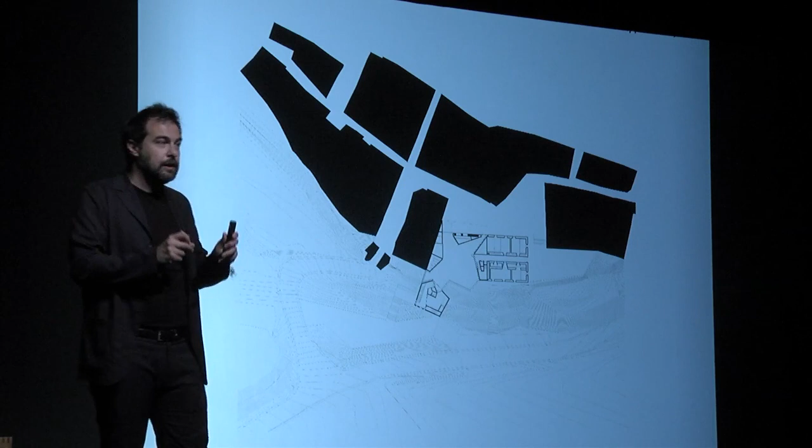From one side, here, with this small element, it's something very sensitive to the context, and from the other side, with this archetypical element, which we will see is a tower, it tries to establish another type of relationship with the landscape. So when we see the project from a distance, it is just an archetypical tower that, as I say, marks the finish and establishes a clear limit between the urban and the natural landscape. It is an autonomous element.

You have to imagine that this landscape, as I say, is an old landscape. It's a very flat natural landscape where small towns appear with medieval towers and so on. But if we go closer to the building, we start to discover that, in a way, the tower is not alone. It's not just an independent object placed there, but it rises from the pre-existing element that hosted these offices for this company before. And there is here a very small link with the pre-existing.

And if we continue, we start to see how the building wants to be specific for this place, but at the same time, it is something more autonomous. And this image, for me, is quite relevant, quite important, because it's a visual translation of this contradiction, of this dichotomy that I mentioned before. From one side, the building is something autonomous, independent.

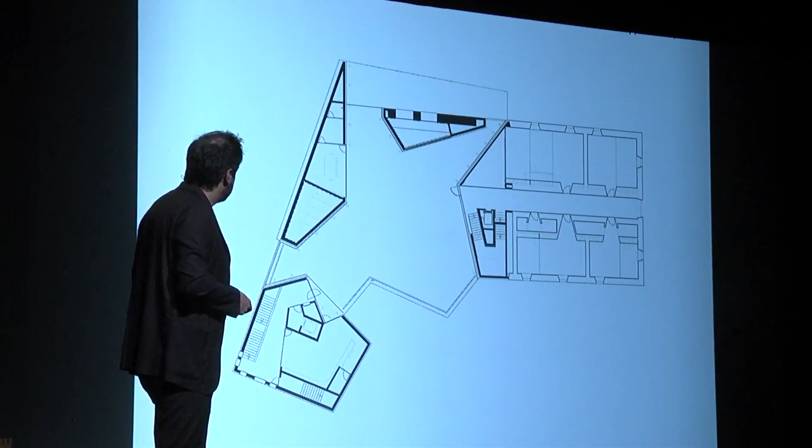It conforms to its own internal rule, but it rises from the pre-existing one in a way. So it starts to be specific for this site. In a way, it starts with this joint. It creates here a plaza, a platform, and then it becomes more and more independent. And the tower contains the most important program, the more representative program, and in the basement there are the other offices, etc.

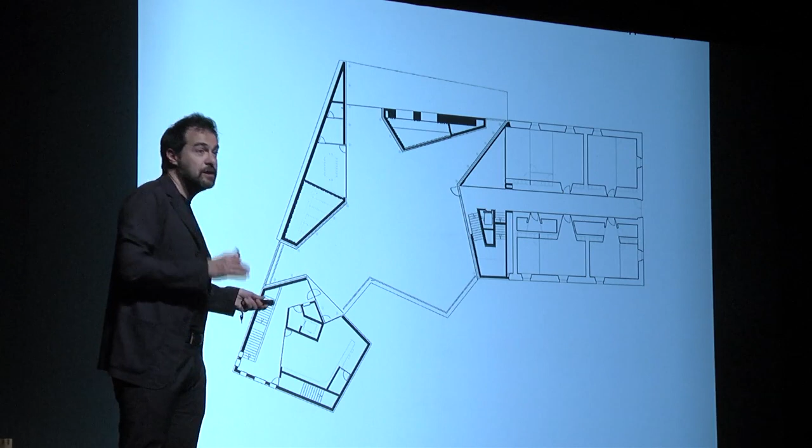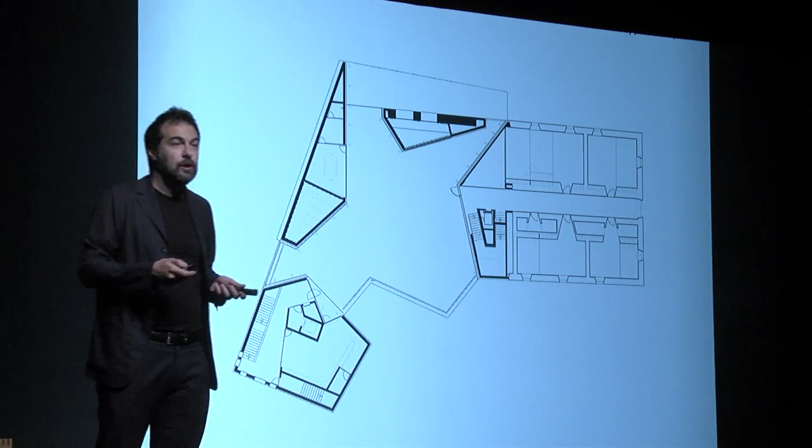But what is also very, very important in this project, and also in the other projects that we will see, is that all our projects started with a reflection about the public space. Here, for example, in this drawing that represents the main level of the building, in the middle of the project there isn't a building, but there is a plaza. In the middle of a private building, there is a public plaza. So in a way, the architecture is just the frame of the urban. And so this image that represents this plaza is for us like a manifesto.

What is important here is not the architecture in itself, but what happens in between the architecture. This central void, this public void in the middle of architecture, gives meaning to the building. It's a private building, but it's able to return something to the city. So in this project, but also in other of our projects, the architecture is just the frame of the public space.

And we try to work in a very essential way. Here, for example, there is just one material, the stone that covers the entire building, the floor, the walls, the roof, and we try to create something more monolithic, something also primitive or basic or archaic in a way. And so in this plaza we also try to establish a kind of balance between a more intimate space here and the openness of the landscape.

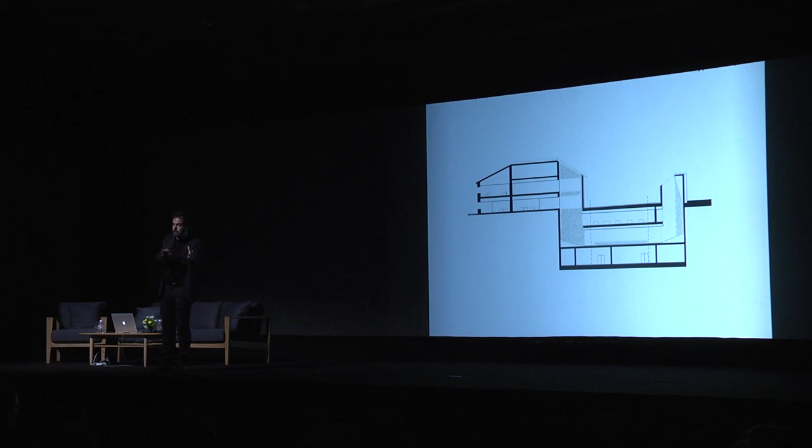But from a programmatic point of view, the project is also very radical in a way. In order to open this plaza in the middle of the project, we put a lot of the program underground, to have space above to create this public plaza. So every project has a small secret in a way. We try to focus our attention on how to create public space and discover how to organize the program in order to have the possibility to create that public space. This is an image of the lower auditorium with this big skylight.

We spend a lot of time discovering which type of materiality the project should have in order to establish this intimate relationship with the context. Here, for example, the building is in stone, the same local stone of the previous building, in order to give continuity and transmit the same gravity, the same solidity of the original building. You have to imagine that with the passing of the years, the building will transform, and step by step it will be more and more linked with the original one.

And here it is important to notice that the building is not built with a ventilated facade, but we forced our client to build it with a real stone facade in order to transmit the same gravity or mass as the original one. And speaking about materiality also means speaking about time, discovering how the building could transform over the years. So it's a way to control or reflect on what time means in architecture.

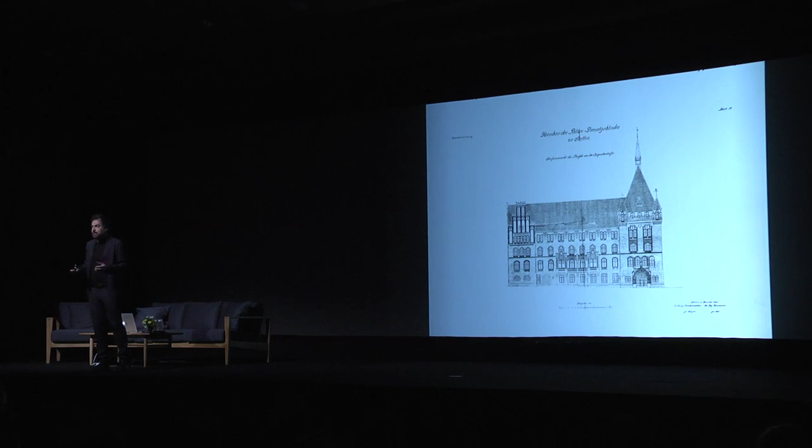So this old drawing represent our closest neighborhood. Is the building on the site of the new Philharmonic. And when I speak about specificity, I want to say that specificity means also discover how to learn from what exists. And this drawing represent or discover to us which are probably the main identitarian element of this type of architecture. These drawings speak about mass, speak about verticality, speak about repetition in a way.

So starting from there, we try to reinterpret it through an autonomous thinking, because speaking about or reflect about specificity, it doesn't mean nothing if you don't filter it through your own interpretation. And the result of this interpretation is this model, is our proposal. It's a building that's still speaking about verticality, repetition, mass, order, composition in a way. Speaking about all these elements that, from our point of view, were identitarian for this context.

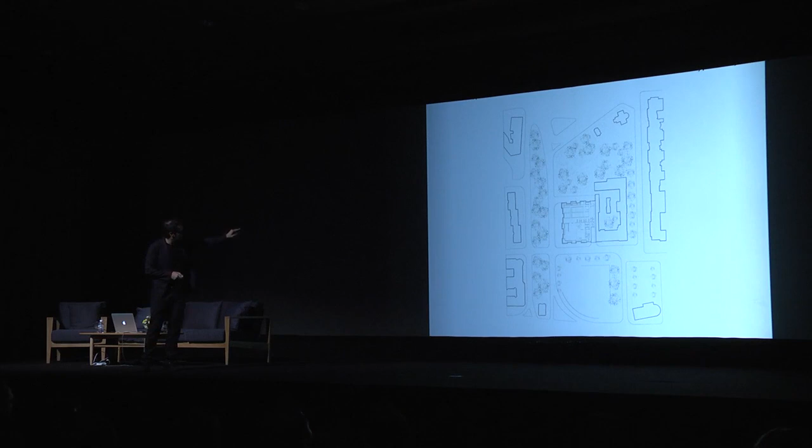And the Philharmony is the first step of a bigger urban renovation of a quarter that now is quite depressed in a way. And from an urban point of view, the building just tried to fix a corner, create an urban corner inside of a quarter quite fragmented in a way. In this case, the project fulfills the entire site.

And the result of our reflection is this image. I can say that all the elements that were in this building, that was our neighborhood, are transformed and converted in something new into the new project. The project is like a stark monumental element in a way, very simple, where the only expressive element is conformed by the roof. This very steep roof that conforms the landscape of the city in a way informs also the project.

But you know, when you design a project, there are many things that happen in your mind, and also we try to establish maybe a kind of relationship with this expressionist condition that is still present in this area. So without any type of nostalgia, we modify the material of the building, to give independency to the new project in front of the existing building. But the only sign of the project is the roof, because we try to be very synthetic, very basic in a way, but also because there are a lot of trees around, so from the distance you will see the building floating over the trees.

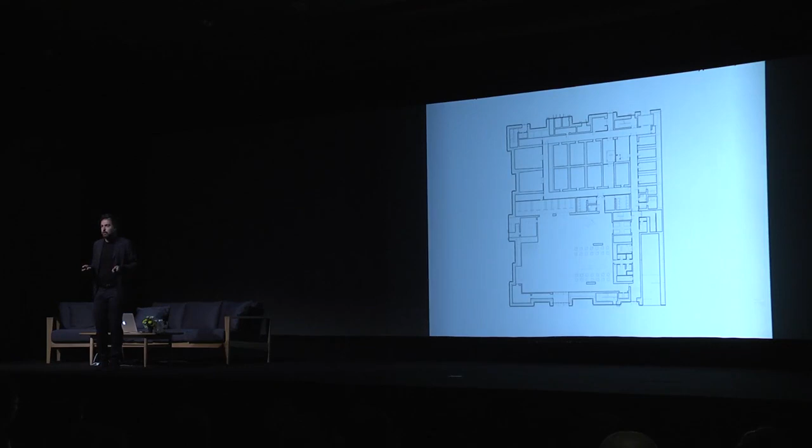And here in this case, the reflection about the public space is still the key element of the project. In this case, there is a very big foyer here that occupies half of the ground floor. Basically, it is conceived like an inner public plaza. So, in this case, the relationship with the public space is not outside of the building, but it became inside. This space is conformed by the natural light coming from the skylight, by the shape of the two concert halls, and from the vertical connection element of the stairs.

So, in a way, this foyer is a public plaza, because what is important is not the architecture in itself, but what can happen inside of a building. Our work as architects is to give the possibility to the citizen to use the building and transform it and have activity inside. So at the end, the architecture is just a background where things happen. And this gives meaning to our work and to the architecture. So in this project, like the other project, we try to solve a very, very complex problem with simplicity.

There are the two concert halls, there are two boxes, inside of this crown. This crown contains all the technical elements, vertical elements, etc. And the interstitial space that appears in between these elements is the public space. So we tried to make the project very, very simple, very clear, very understandable in a way.

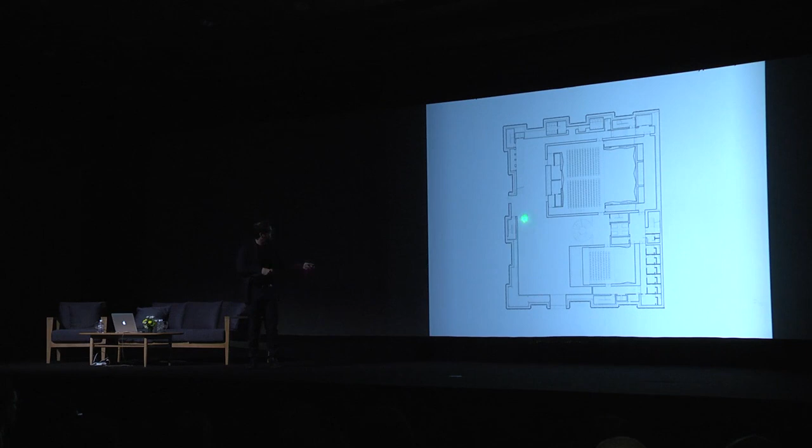And then there are several levels, and in the upper level there is an exhibition area here that connects the two main systems, because inside of the building there is an internal loop where the people can go up here or with these stairs here, move around the building, and they rejoin here in this area. So it is important that a building of this dimension should be very easily understandable in a way.

This exhibition area is suspended over the foyer here, and you have a visual connection to all the spaces, and this permits the visitors to be oriented inside of the building. But the main program of a symphonic hall is for sure the concert hall. And the challenge was how to design a contemporary concert hall for classical music.

So we started to work basically with three elements: with the section, light, and with the ornament. The section, as you see here, is basically a reinterpretation of a traditional and classical typology of the Eastern European concert hall. There is a very flat floor here. So this is the first step in order to transform a tradition into something new.

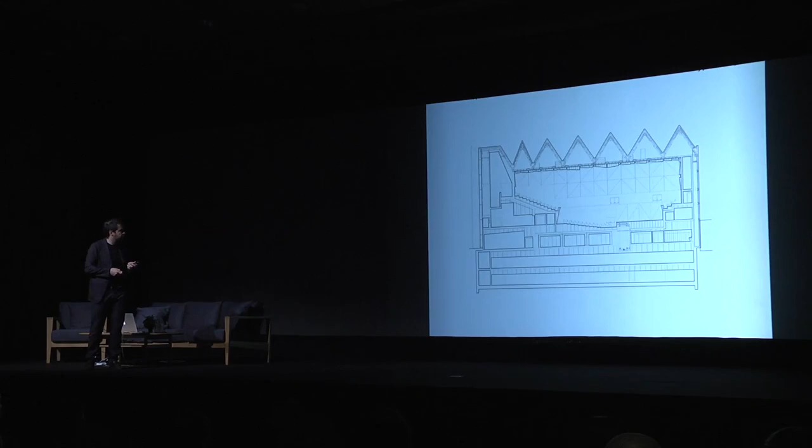But then we discovered, also starting to have in mind this idea of ornamentation that conforms the classical concert hall, and we started thinking that probably starting with a detail like this, with an ornamental detail, we were probably able to conform the entire concert hall. So basically this concert hall is conformed by a decoration or ornamentation on a large scale.

But what is really interesting is this ornamentation is not really just an ornament, because all these surfaces are made like this in order to achieve the best acoustics. They are really a very high-tech element in a way. So if we are able to join decoration with technique, the ornament is not an ornament. It's something else. And so in this case, we tried to discover how an idea of an ornament is able to create something performative for a building.

And here, as I say, the other element very important for us was the light. The light was another element able to give continuity to a tradition. And the light also transformed the perception of the concert hall inside, the materiality of the concert hall. But we also worked with a very unusual material here. The concert hall is conformed with a gold leaf, a synthetic gold leaf, in order to, again, give continuity to something and discover an unusual or unexpected use of this materiality in order to conform a new, contemporary concert hall.

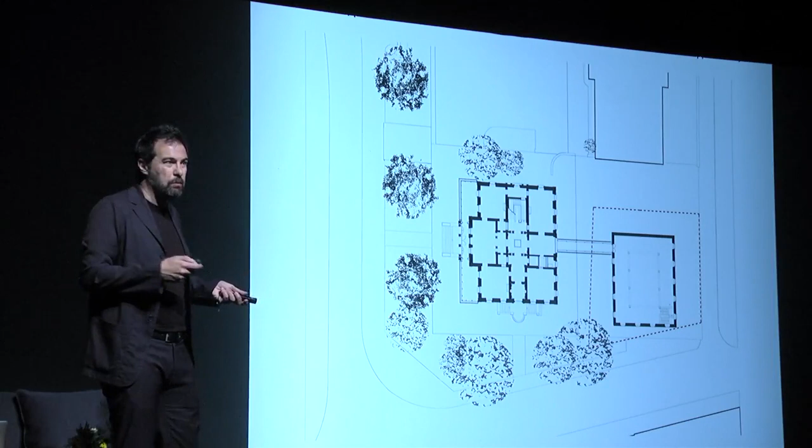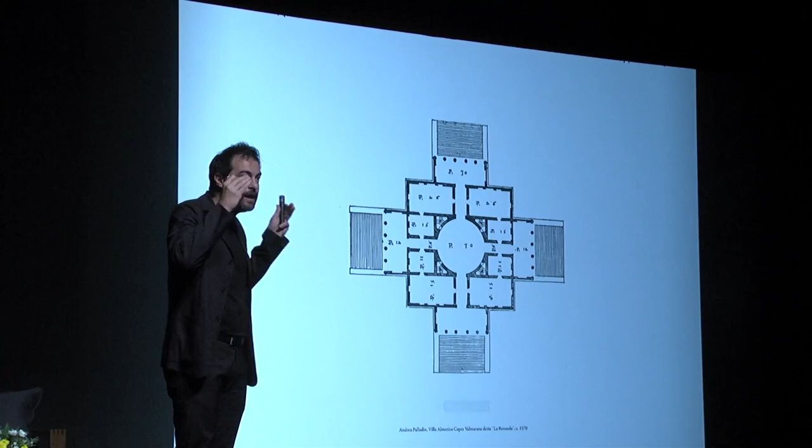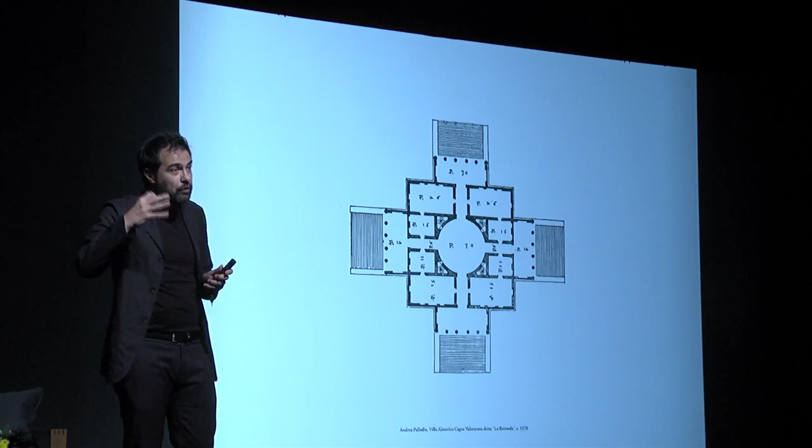So the competition that we won was very, very complex because they were asking us to place a very big program inside of this site, in that part. And here you can see this conformation of the historical building based on La Rotonda. So the condition of the original building for us was very important. This is the Rotonda by Palladio; this idea of an absolute building was important for us in order to discover how to create the new building.

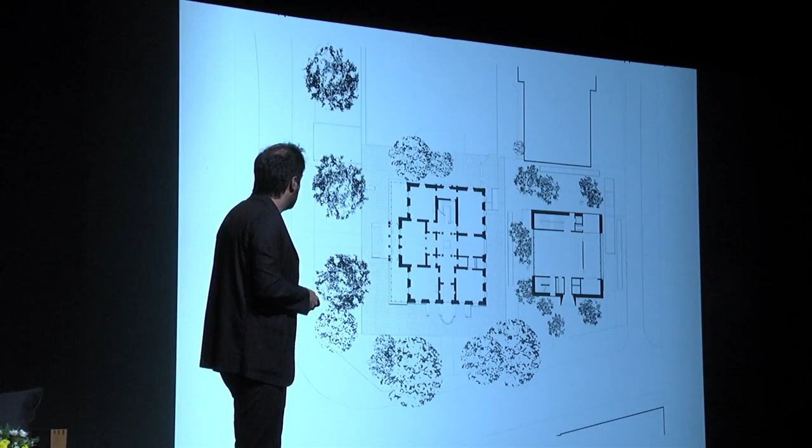So what we did was very, very simple. We just extracted the axes from there, imported them to the other building, and we tried to make a project very simple, super simple, very small, in order also to use the garden around the building and make the garden also around here, in order to use the garden as a link between the two buildings. So, in a way, what we tried to do is create a diptych.

The same identitary elements that appear in this original building are transformed into the new addition. Each one is an autonomous building, but each one is conformed with the same conceptual elements. And again, the building is something super specific for this condition, but it preserves its autonomy, as I said at the beginning of the lecture. And which are these elements?

I can say that our project, in a way, is a neo-Palladian building, because as we see, the plan is conformed by a repetition, a very regular sequence of rooms. It's conformed by a double symmetry that comes from the original building. And there is this kind of bas-relief that conforms the facade, creates an ornamentation, and tries to create a subtle link with the decoration that conforms the original building.

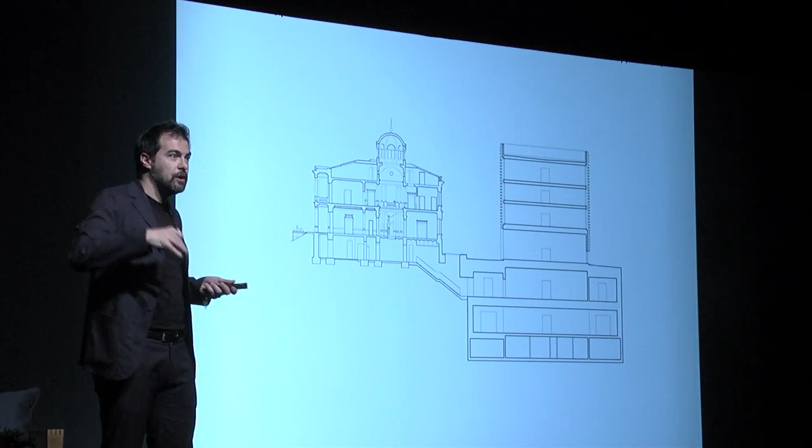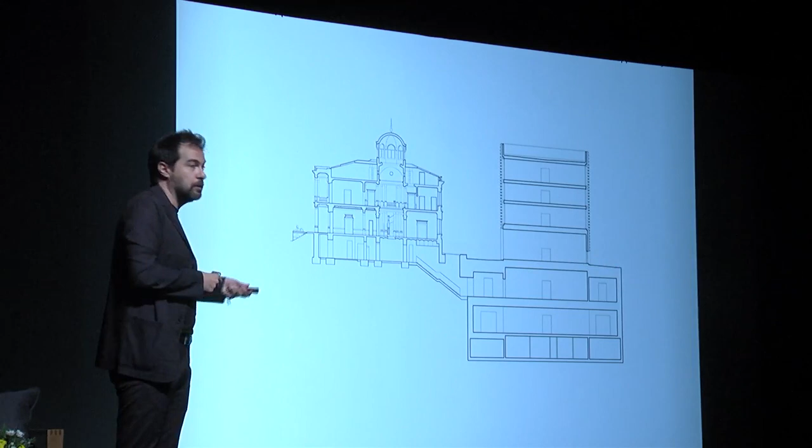We placed all the exhibition area underground here, and we let only the public function use outside here. So in this way, we were able to reduce the size of the building, reduce the footprint, and give importance to the public area. And the connection with the historical building, with the exhibition area made by Peter Zumthor, became here with these stairs in this part.

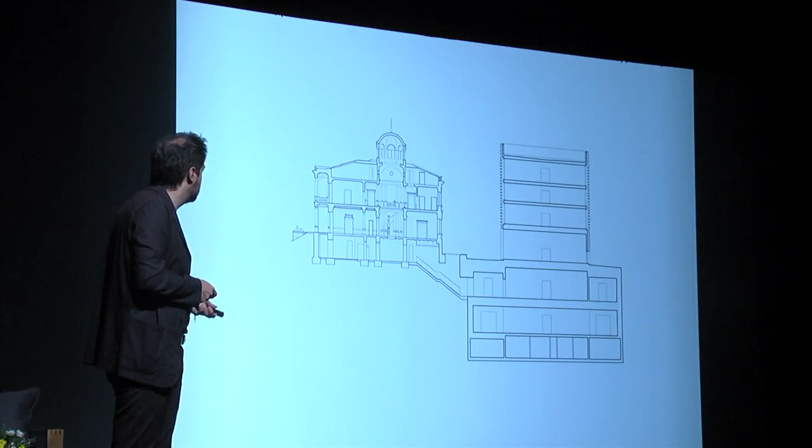So the foyer, it's again a public area, and the relationship with the historical building is quite evident. The facade of the historical building is the facade of the new building. And also what is important to know is that this area is the foyer, but at the same time it is the delivery area, because here in this area a truck can enter, and here there is a big elevator. So we try to combine also the program in order to compact the building to the maximum.

So this simple drawing that I personally love is, I think, one of the most synthetic, most basic, most elementary drawings that we did, because there is everything here. The building is composed just by the structure. The structure contains the core, contains the elevation. The composition of the building and the structure is the same thing. So it expresses our effort to be synthetic in a way.

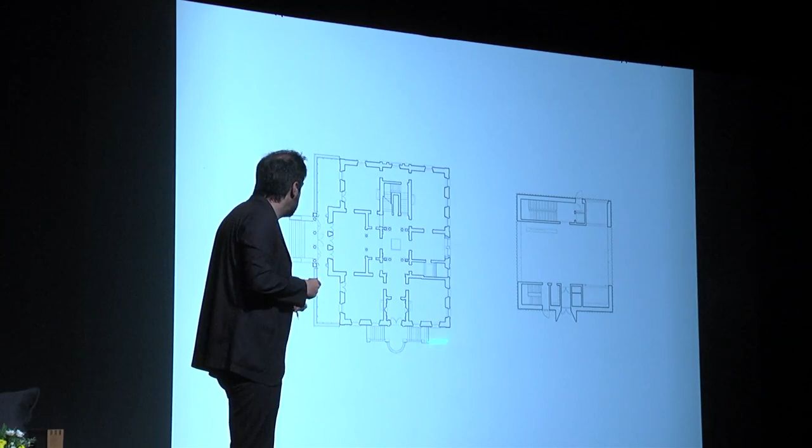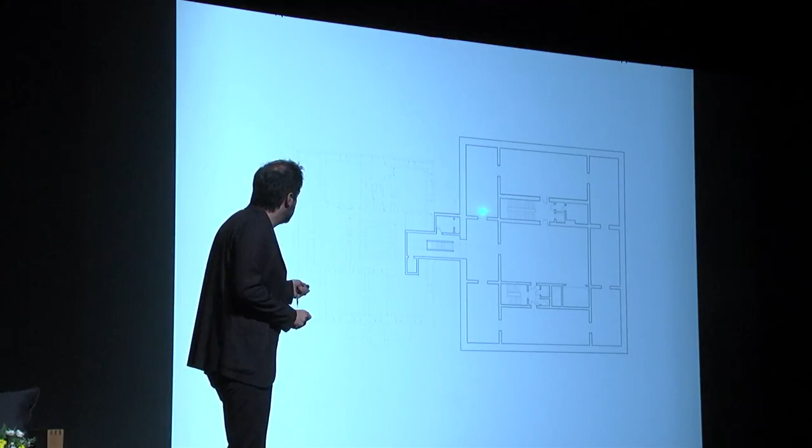And this plan and this plan, they are balancing in a way. There are these stairs, this element, there is the portal hall. Everything is simple but quite clear. Here, these are the stairs that go down. This is the first floor underground. The museum is in concrete. And here is the plan of the first floor, and you see that basically it's composed by a sequence of rooms, in a Palladian way, and there is a loop to visit the exhibition here.

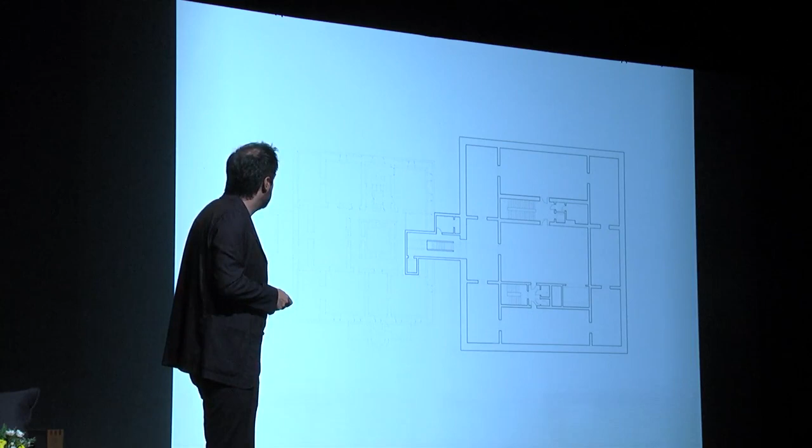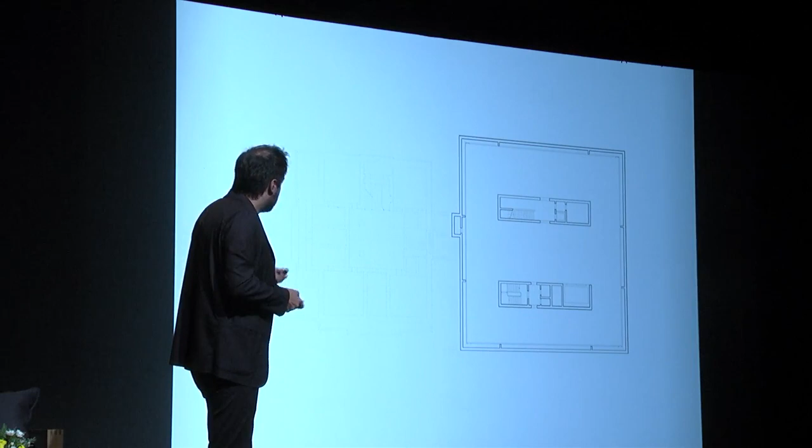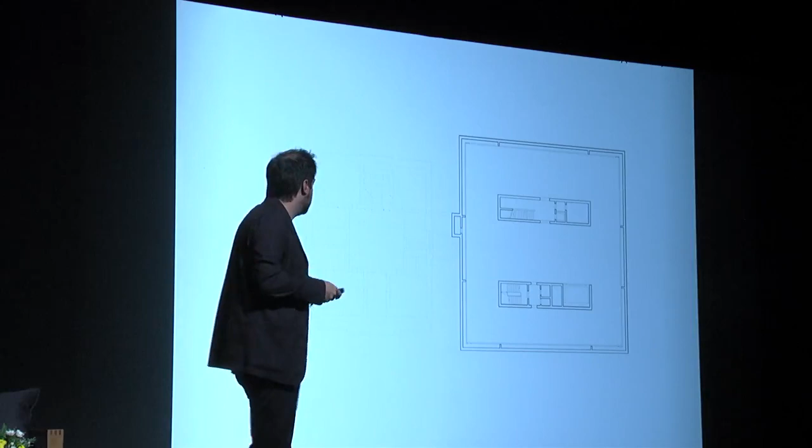These are some images of this museum that is basically devoted to contemporary art. This is the connection to the other building. But in the second floor, again, you see how a complex program is solved in a very simple way. There are just the two cores. This space is for temporary exhibition, very open, and there is no more. But the precise position of the core of the structure permits us to conform the entire program with simplicity.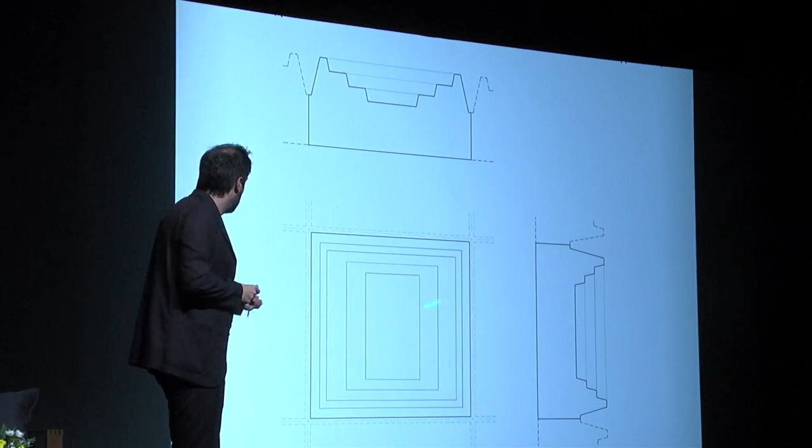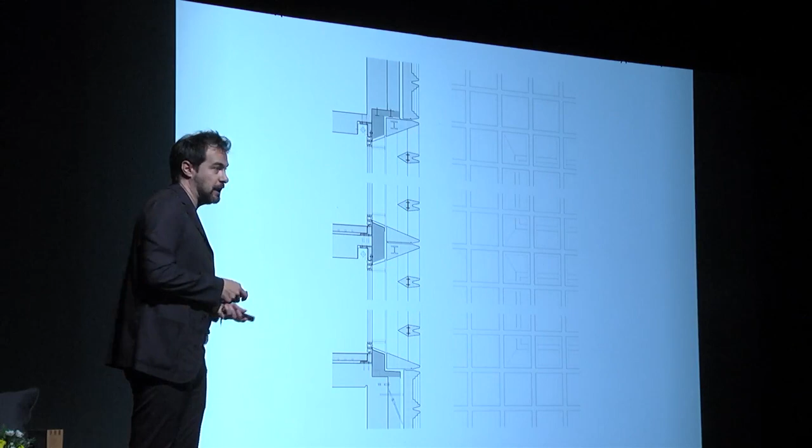So the materiality of the building, as I say, is absolutely important. The facade is composed by a sequence of these elements in concrete. There are prefab concrete elements that conform the entire facade. But you have to notice that when I say that for us it's important to discover how to work with specificity, it is not only to reflect about the form, but it's also important to discover how you can work in a different context.

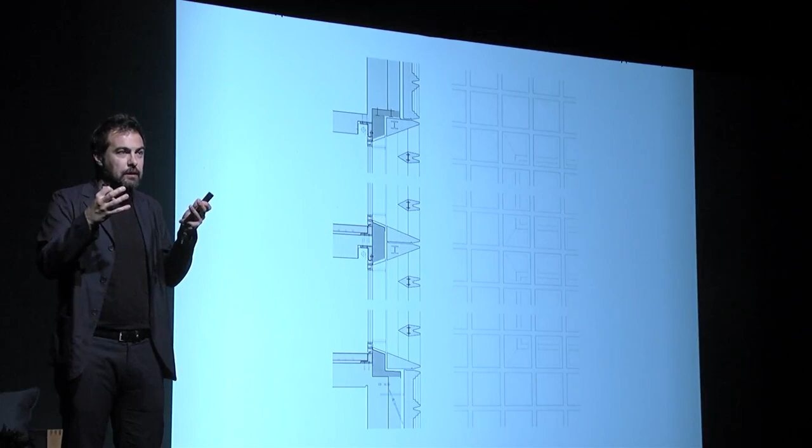For example, the Philharmonic in Szczecin is basically a handcrafted element, because in Poland there is still a tradition able to conform this handmade element. So the concert hall is basically a handmade element. But here in Switzerland, there is a high technology with prefab concrete that permits us to achieve this type of facade, where with the concrete we are able to make edges of only 1 centimeter. So it is important also to interpret how you can work in different conditions.

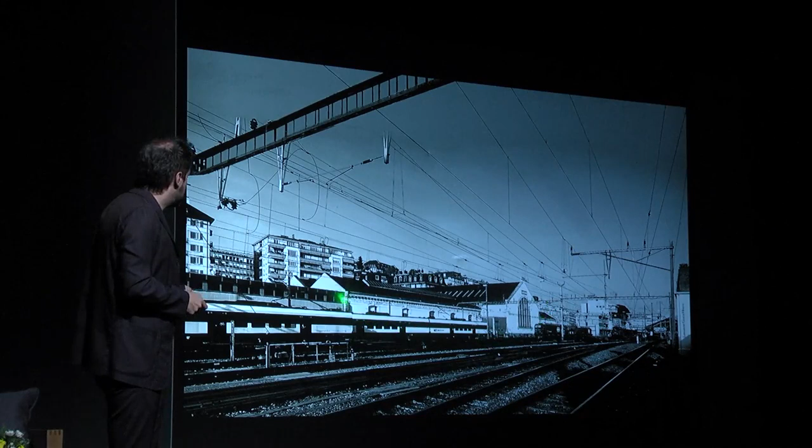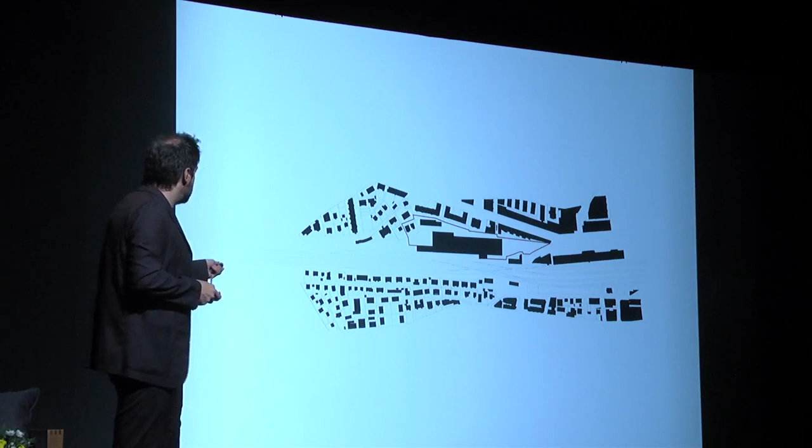In this case, this drawing represents the original area, no? The site, very big, and then with the presence of this building. We spent a lot of time during the competition discovering how to transform the historical building into a new museum. But at the end, after a few months, we discovered that probably in this case this strategy was not so good. We started to discover that, again, before thinking in architecture, it was important to discover an urban strategy able to create public space. So we started thinking that what was important in this project was to combine urban and architecture.

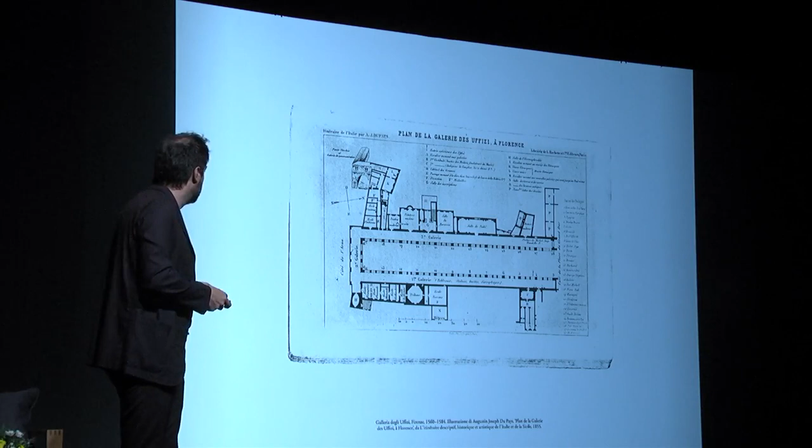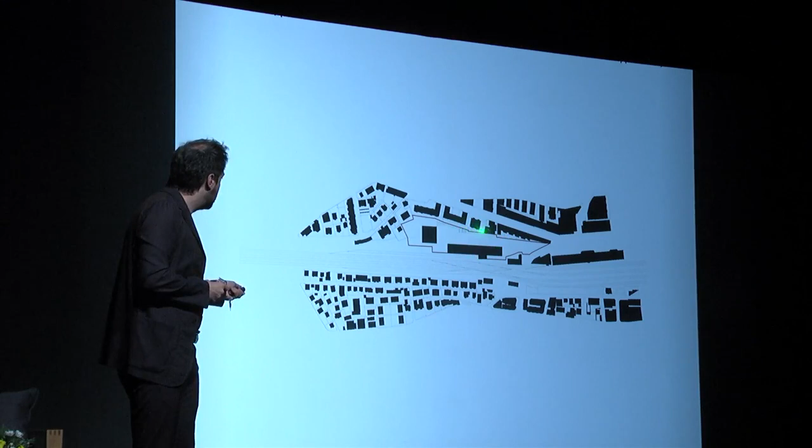Like, for example, in the Uffizi. This is a plan of the Uffizi Museum in Florence, where the architecture and the urban and the plaza in the middle are the same. There is no difference between architecture and urban. So we took a very sober, but at the same time radical, decision. We decided to demolish a big part of the original building in order to create this new big plaza, no? Able to connect this area with the plaza in front of the rail station, and in this way try to conform this new site linked with the city.

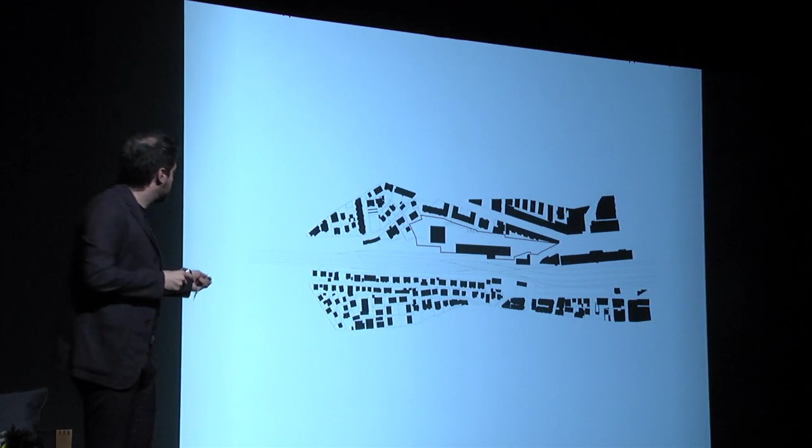Because this project was about creating a new fine art museum, a new museum for photography, and a new design museum. So now the three museums are condensed here in one only building. But what's important in this project was again this public area. So our intention was to try first to create a public space and then discover which kind of architecture is important for this site. So what is important here is, again, this public space, no? And the architecture, the three museums, again, are the frame of the urban space. The Fine Art Museum, Design Museum, and the Photography Museum.

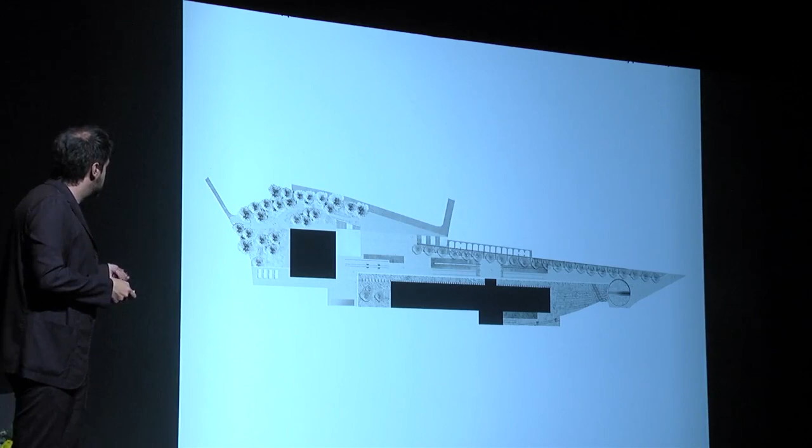And then the building is again specific for this condition. This area is an industrial area in the center of the city, linked with the train station. So the new museum is basically like a kind of industrial building. It's a building very abstract, very rigorous, very simple in a way. So after we discovered this urban strategy, the architecture arrived very, very easily in a way. No? The building is something massive, something solid. It tries to reinterpret this industrial condition that still exists in this area. So this is the general drawing of the master plan.

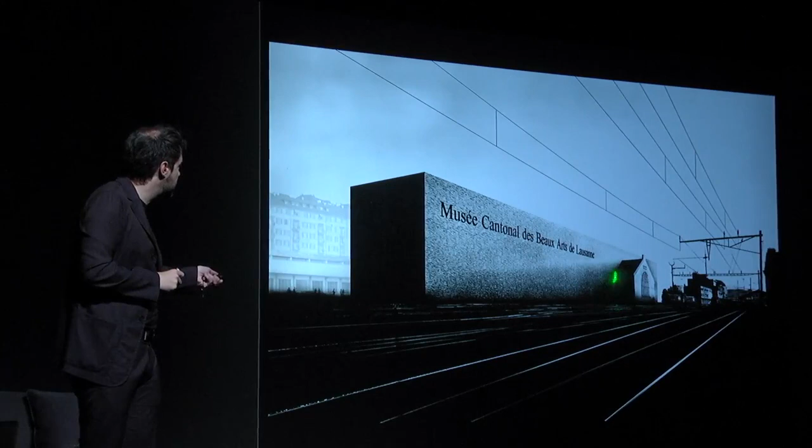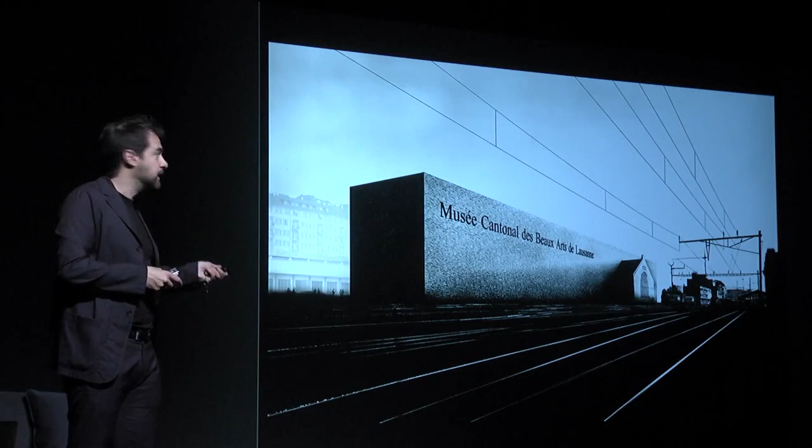But in order to create the urban space, we decided to demolish something. But then the question was how to preserve the memory of a place if you demolish something. So we started thinking that probably we were able to preserve the identity and the memory of a place through a constellation of fragments. So we decided to preserve a small element of the pre-existing building, and we transformed this small element into the main compositive element of the new museum. This museum is conformed by a classical sequence of elements. There is a neutral background in front of a figure that is this small element. So in a way, the project still comes from the original building.

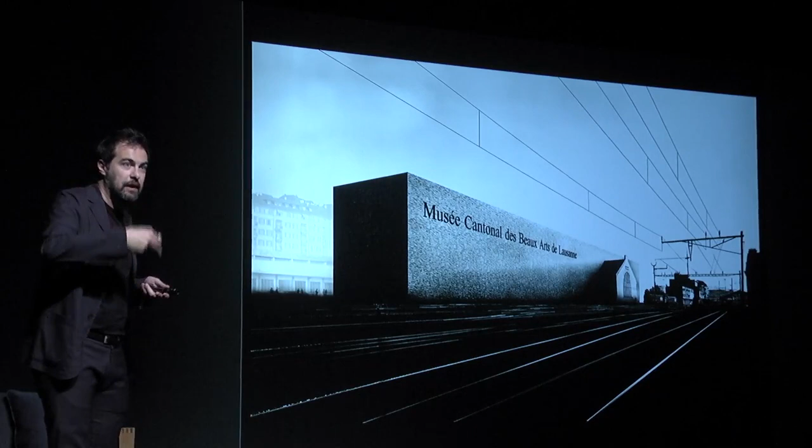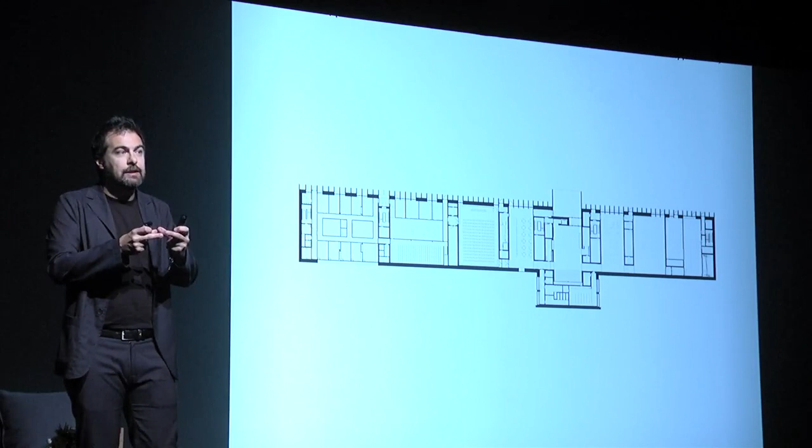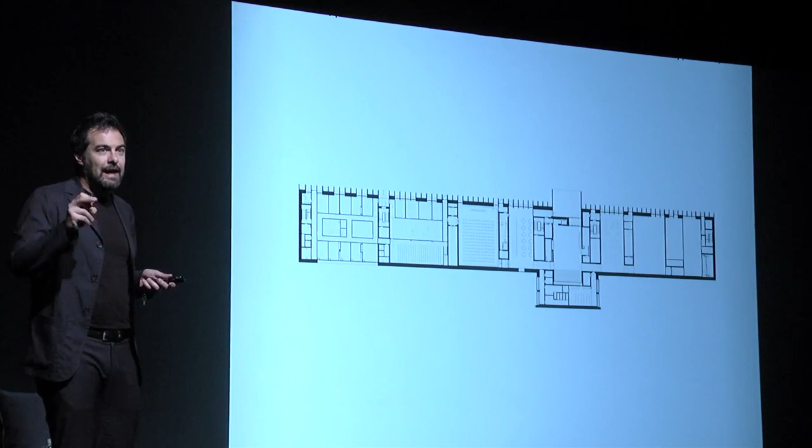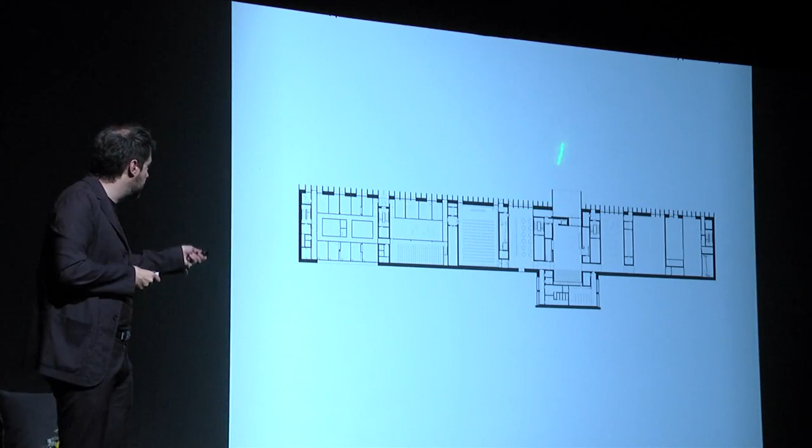So from that side, the museum is very closed, in order to protect also the art from the train here. And from the other side, the museum is very open, very permeable, in order to create life in this public space. So the museum is basically an inhabited wall. No? On the ground floor there are all the main public spaces, and this small pre-existing element is not something irrelevant, but is the crucial element of the new museum, because here there is the new foyer exactly in the axis of this fragment.

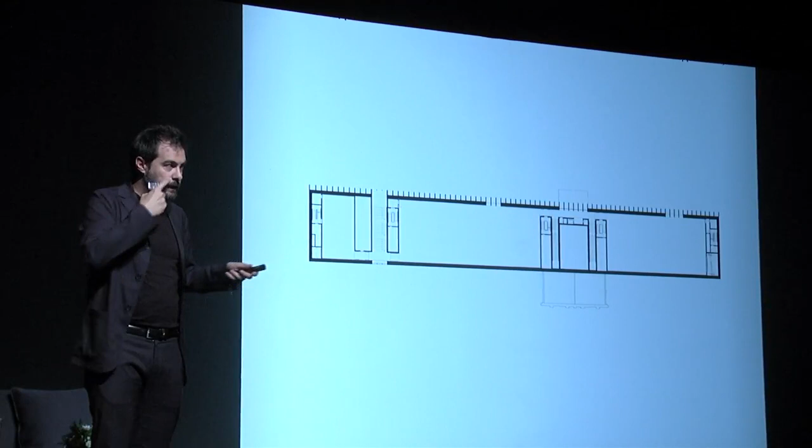So what we saw before, this very beautiful arch window that for us was the most beautiful or emotional element of the pre-existing building, is transformed into something new, and it is the main element of the new foyer. Then the stairs go up, and here is the second floor. Like in Chur or like in Stettin, you can feel how a very big museum, this museum is about 18,000 square meters, is solved with 5 elements.

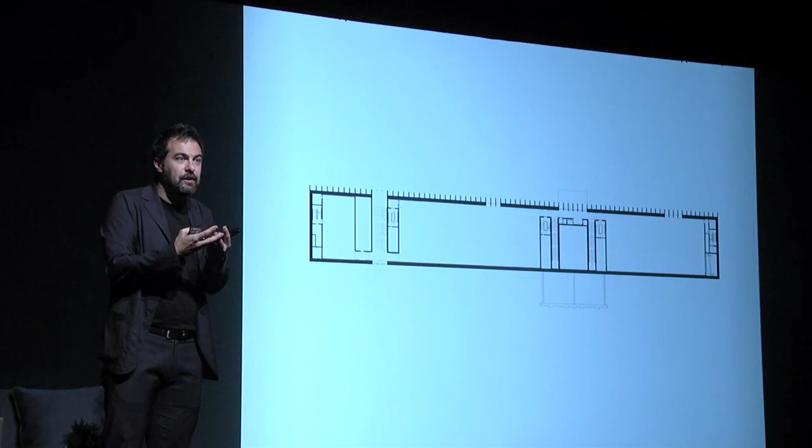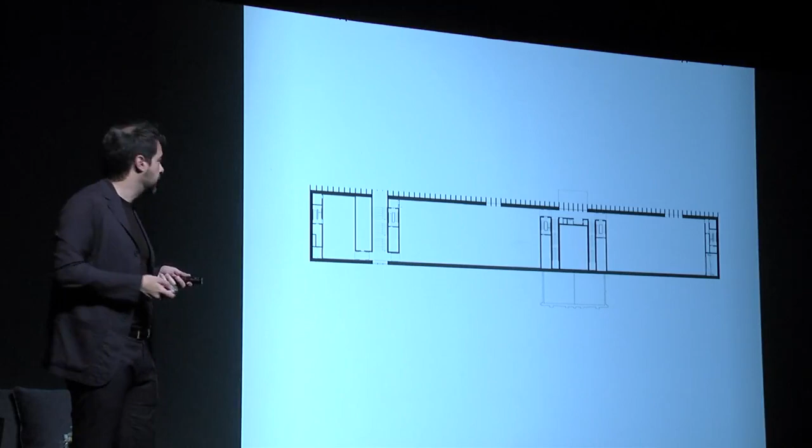There are basically 5 cores here that are able to divide the program; they conform the main structure of the building. So again, we fight in order to condense everything in very few elements. And I think that this drawing tries to represent quite well our intention. And then there is the second floor, it's conformed by natural light, and there is a very special ceiling, but maybe this is for another presentation.

And then the last project I present you is a different project, because last year we had the opportunity to design a house. And for us it was quite unusual, because during these years we designed basically public buildings. And also it was a different project because for the first time we were designing something in a very natural landscape. In this landscape there are no pre-existing buildings, no small village, nothing. There is just a very beautiful landscape. How to design the house there?

As Louise Bourgeois reminds us, our effort in thinking and design is raised from our very primal, very intimate intention. And which was our main intention? For this project, what is important is not the object in itself, but what happens in between different objects. So in this case, we thought it was more important to try to create a place than to create just an object.

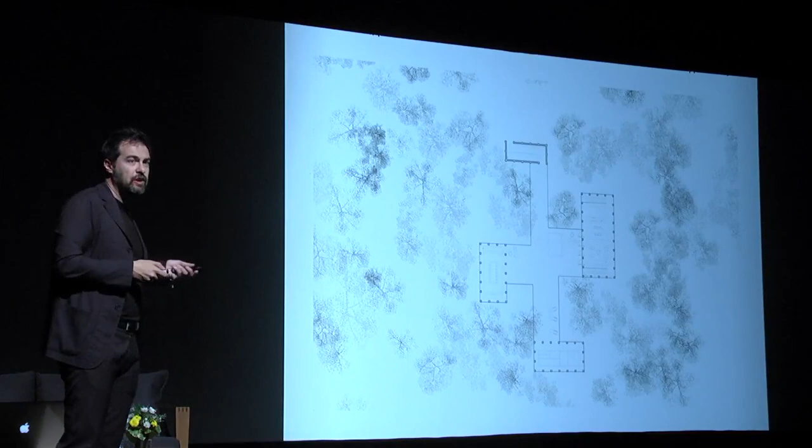So the house is composed basically of 4 pavilions, each one dedicated to one function. And in between these pavilions is where the life appears. Because this house is for summer, for spending some days, and for living basically outside. The house is placed in the area south of Barcelona, an area where in summer it's very, very warm.

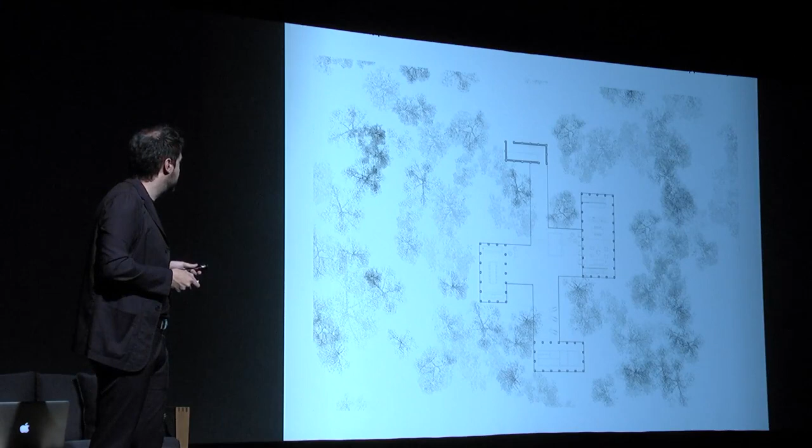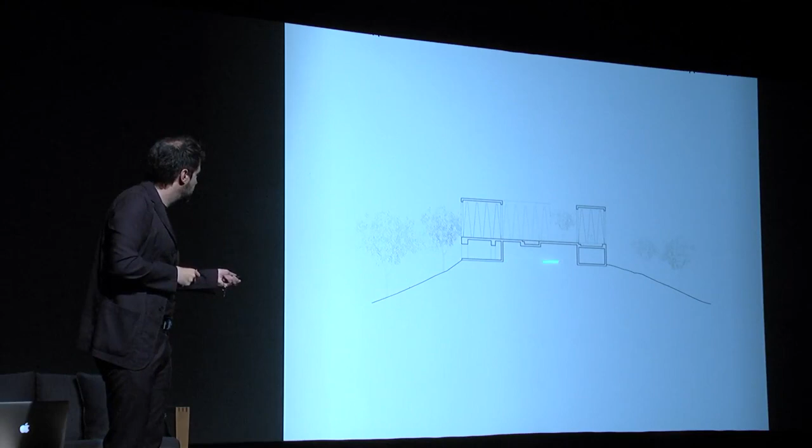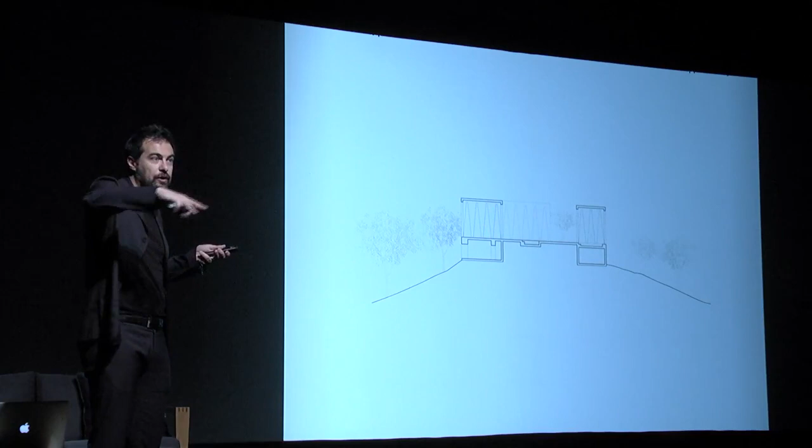So the plan of the house is again very schematic, very simple. There is an entrance pavilion here, the house with the living room, an exterior area here, and the swimming pool. And there is a platform that links these 4 pavilions, and the entrance to the house is from there. So we started to artificialize the nature. We placed this plinth here in order to make the platform horizontal, and we placed the pavilions over this artificial plinth. And the house is basically just a shelter, something able to protect you, no more than this.

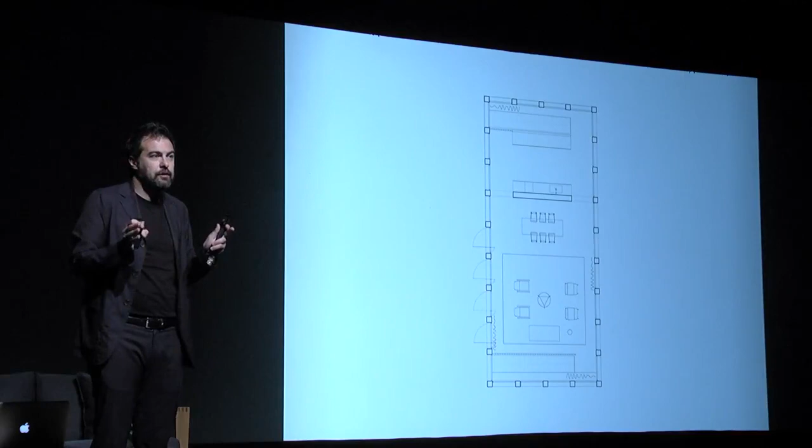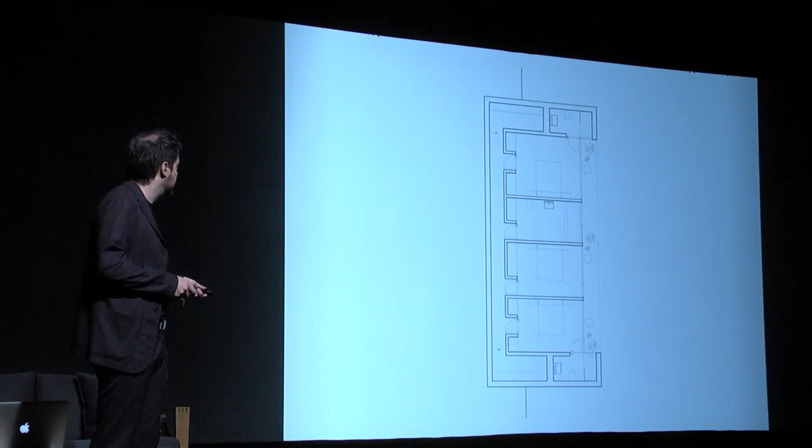This is the first floor. It's the living room, the kitchen. There are 2 stairs, then a corridor, and into the plinth there is the most intimate part of the house, with some rooms open to the valley here. So what we tried to define is an experience, as the client was asking. We tried to create an experience for living there in relationship with the nature.

So you have to leave the car very far away. You take a path into the wood, and you arrive here. You discover that there exists a small, empty pavilion. You enter there, there is water here that refreshes. You can feel the freshness of the water, and then you cross this entry pavilion and you discover your microcosm in a way. The house is not an object. What we are interested in is which type of relationship the people that will live there will establish with the surrounding nature.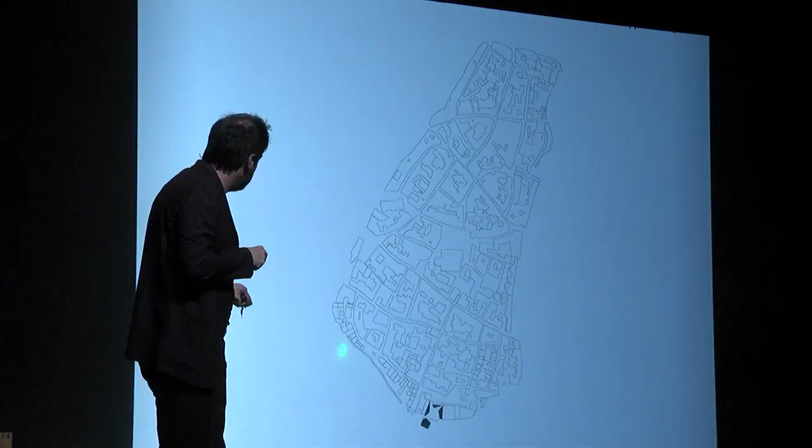This building is placed north of Madrid in very old territories, very flat, very horizontal. Wait, I take this one. The project is placed in a small town, just at the limit of the urban area here. And in a way, this specific geographical condition has marked the project. The project is an interpretation of this condition, a singularization of this duality.

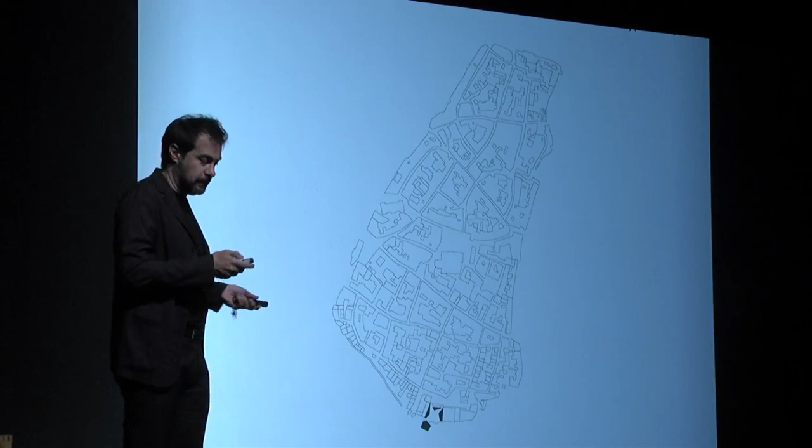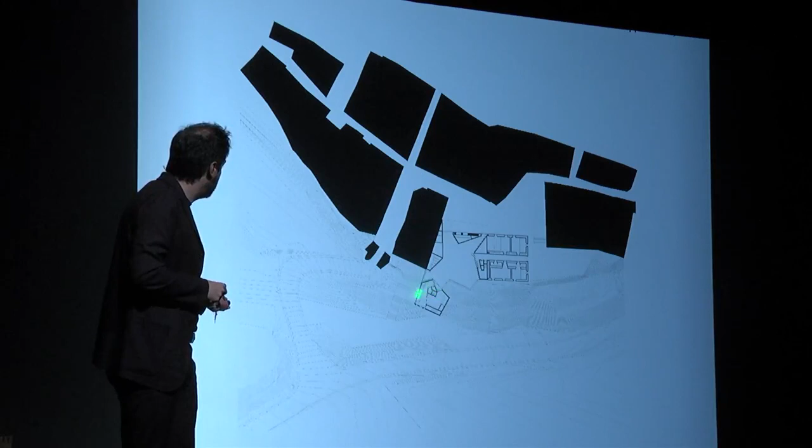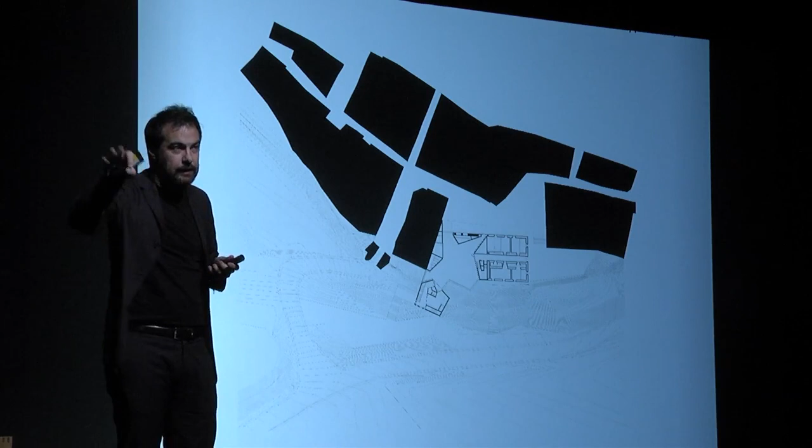So, from one side here, the project starts to recompose and finish the urban tissue, and from the other side, as we will see, it tries to establish the limit of the urban in front of the natural landscape. So in a way, this duality came from a geographical condition.

The office was also selected to be part of Design Vanguard from Architectural Record magazine. In 2015, the studio won the Mies van der Rohe Award, granted by the European Union. Now, please welcome Fabrizio Barozzi.